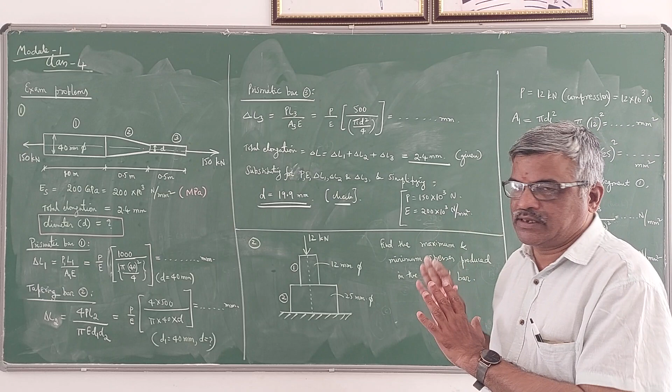So in this problem the diameter is unknown, and he has given the total elongation. So what we have to do here is consider them separately, because this is a prismatic portion, this is a tapering portion, this is a prismatic portion. We have to apply the formula separately. So first I will consider portion 1, the prismatic bar portion. We know that for the elongation of a prismatic bar, the formula is PL by AE. Here P is the same. In the last problem we had different P values, but here P remains the same, 150 kN tension force.

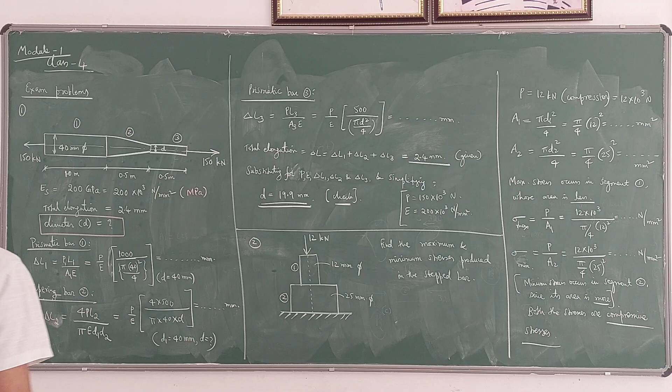So L is L1, which here is 1 meter. I will take it as 1000 mm. Then divided by A1 into E. So the area we have to calculate. He has given the diameter here, and if the diameter of the bar is given, the area is pi d square by 4. Now if you substitute the values, P and E are constant here. For all three portions, P is the same and E is also the same. That's why I have taken P by E outside. It's common for all three.

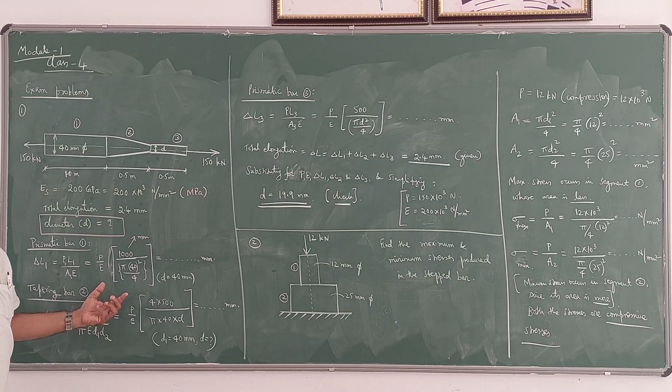It becomes P by E into L1 by A1. So L1 is 1000 mm. Please see that meters are converted to millimeters, and the area of the first portion is pi d square by 4, where d is 40 mm. So substitute d here. You are going to get some value, into P by E. That you have to calculate. Put d as 40 in pi d square by 4.

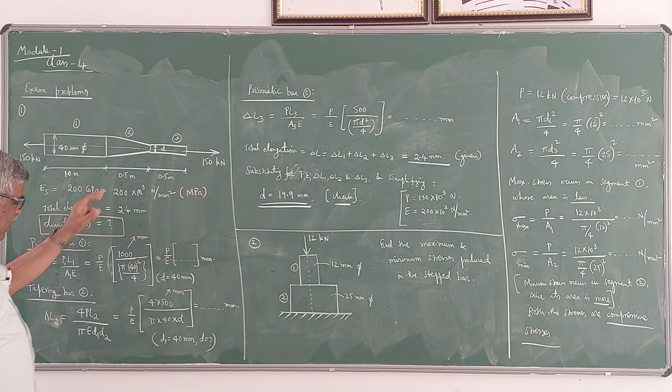Then for the second portion, the formula is different because it is a tapering bar. We know that the deformation of a tapering bar, delta L, is 4PL by pi E d1 d2. Here L is L2, which is 0.5 meter, 500 mm. Here also I have taken P by E outside, common. So what remains is 4 into L2, 500 mm, divided by pi into d1 d2. Here d1 is 40 mm, since it varies from 40 to d, so d2 is d. After simplification you get another value, with d in the denominator, since it is unknown. P and E we can substitute at the end. So this is the formula for the tapering rod.

Next, the third portion is once again prismatic, so it is PL by AE. So delta L3 is PL3 by A3E. P remains the same, E is constant, P by E I have taken outside, and L3 is 0.5 meter, which is 500 mm. Divided by the area, pi d square by 4, where d is unknown. So we get P by E into some constant value divided by d square. Note that in the first there is no unknown term, because constant values are given. In the second it is divided by d, and here divided by d square.

Now he has given that the total elongation delta L is delta L1 plus delta L2 plus delta L3. All are positive because all three portions are subjected to tensile force only, so we have to add. Delta L is 2.4 mm, given in the problem. Therefore we have to substitute all these values. So delta L, 2.4 mm, is the sum of all three. So delta L1 is this, see, this is delta L1.

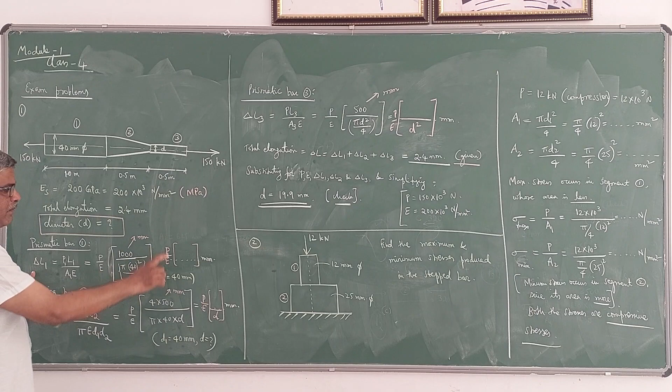Delta L1 is P by E into some value, plus delta L2 is P by E into some value divided by D, plus delta L3 is P by E into some value divided by D square. So once you substitute these here, delta L1 plus delta L2 plus delta L3 is equal to 2.4. So RHS becomes 2.4, and for P and E also you have to substitute. P is 150 into 10 power 3, E is 200 into 10 power 3.

So you have to convert to Newton and millimeters, and once you substitute and simplify, you will get a quadratic equation in D. So you have to solve that quadratic equation. You will get two values for D. One value you may get negative, another value you may get positive. So you have to take the positive value. Which value you have to consider, you can judge after getting the solution.

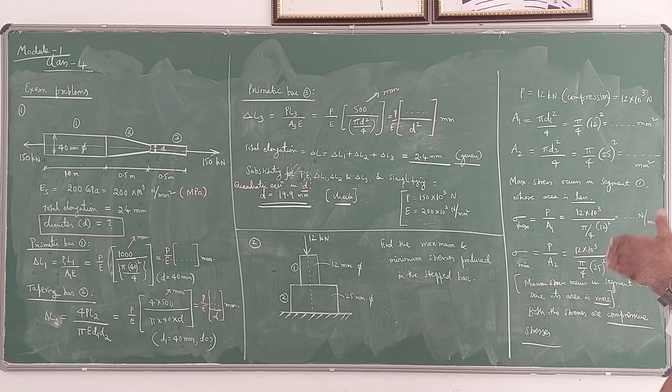So you will be getting two values of D, out of which one value is 19.9 mm. So if the diameter of this prismatic portion is 19.9 mm, then the total elongation will be 2.4 mm. So this is another type of problem wherein total elongation will be given and you are asked to find the diameter or area, whatever is unknown, or length also can be unknown. They may give this length as unknown. Then in that case L3 will be unknown.

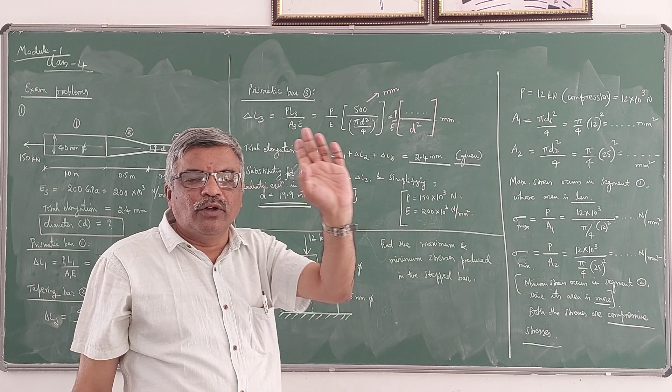So one unknown can be easily solved. Length can be unknown, diameter can be unknown, area can be unknown. Once you substitute in the equation and simplify, you are going to get the answer. So D is 19.9 mm. That is the answer for this problem.

Okay, now we will have one more problem in the same question paper. It is a very simple problem. He has given a stepped bar here. You can observe, this is like a column, stepped footing. In this small footing, the bottom portion is circular in shape, which is 25 mm diameter. So the diameter of this is 25 mm. This is the plan. In plan, you can see like this. This is the cross-sectional area.

So this is A2, because it is the second portion I have considered. A1 will be like this. This diameter is 12 mm, and this is A1. So there are two portions here. Actually this is a column. It is a vertical member and compressive force is applied here. This 12 kN is a compressive force acting on this stepped column or footing.

What he has asked is, what is the value of maximum and minimum stress produced in the stepped bar? If you observe the problem, both portions are subjected to the same force, 12 kN. Both segments 1 and 2 are subjected to the same compressive force, but the areas are different. Area A1 of the first portion is less, area of the second portion is more.

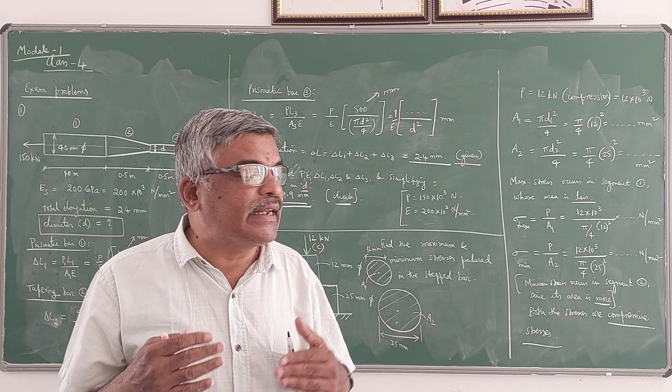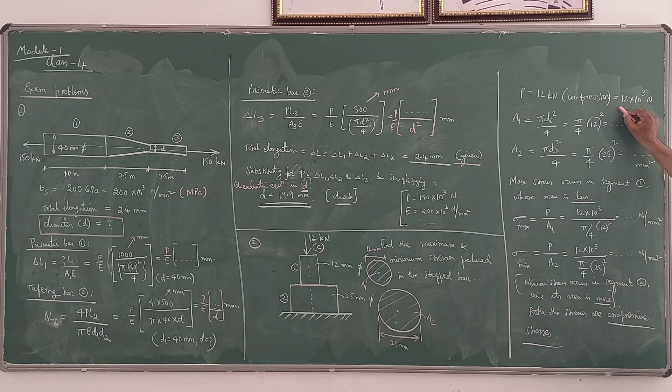You know that stress is inversely proportional to area. If the force acting is the same, stress increases with decreasing area, because area comes in the denominator: sigma is equal to P by A. P is the force acting on that member and A is the cross-sectional area. If area is less, the stress will be more. Very simple concept. Here he has given P as 12 kN compression, convert kilonewton into Newton, then calculate A1 and A2. This is circular in shape.

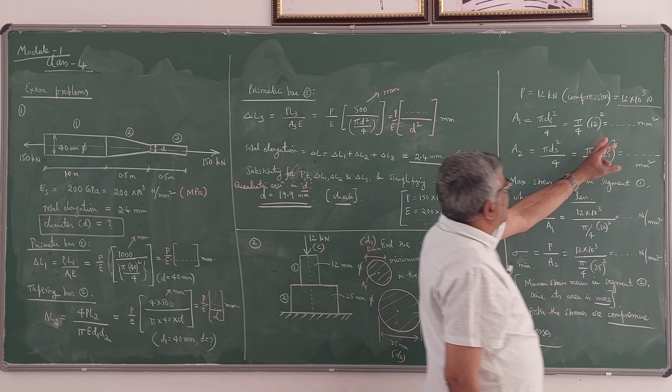Suppose if they give rectangular in shape, you have to multiply the widths in both directions. It is circular in shape, therefore areas are given by pi d square by 4. So A1 is pi d1 square by 4. D1 is 12 mm, D2 is this. Find out the areas A1 and A2 and you get values in millimeter square. As I already told, stress is more if the area is less. Area is less for the first portion, therefore maximum stress occurs in segment 1.

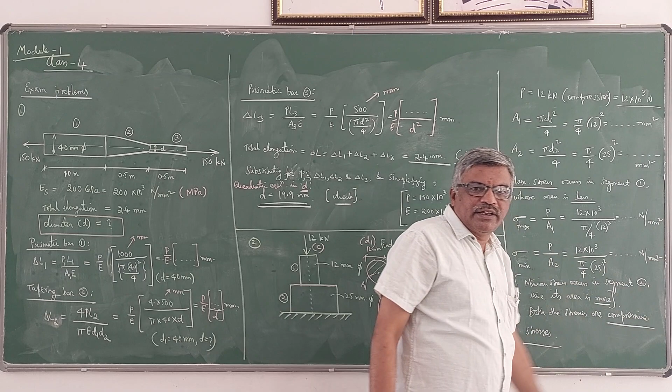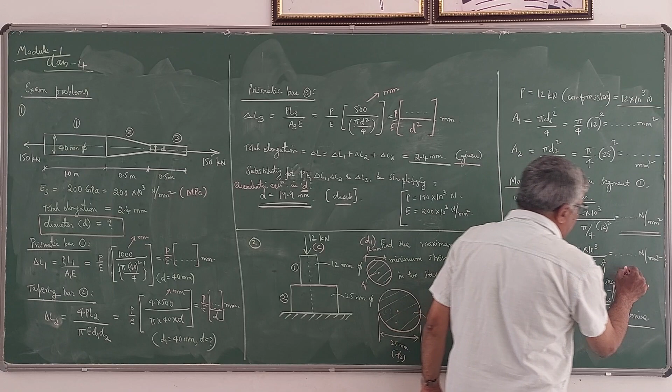Sigma max is the maximum stress; sigma represents stress. Maximum stress is given by P by A1 because A1 is less. P is 12 into 10 power 3, A1 is this value. Substitute and simplify, you will get the stress in Newton per mm square. Similarly, minimum stress will be in the bottom segment where area is more. Here diameter is 25 mm, pi d2 square by 4. P remains same, so 12 into 10 power 3 divided by A2 is the minimum stress. Minimum stress occurs in segment 2 since its area is more.

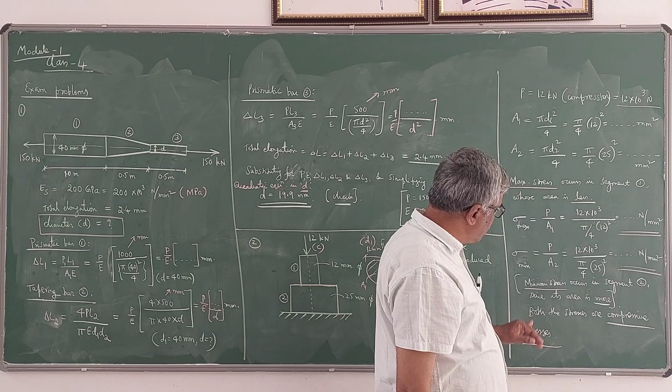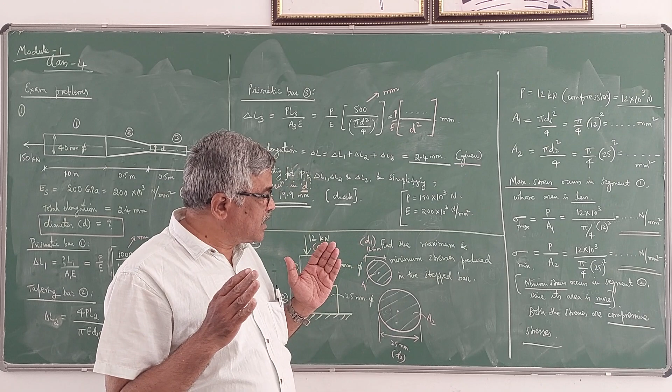But both are compressive stresses, because the same compressive force is acting on both segments. This is a very simple problem. But why he has given this for 4 marks is, you should know the concept of stress, how stress varies. Stress is directly proportional to force, inversely proportional to area. Where area is less, stress will be more. Where area is more, stress will be less. That is the concept behind this problem.